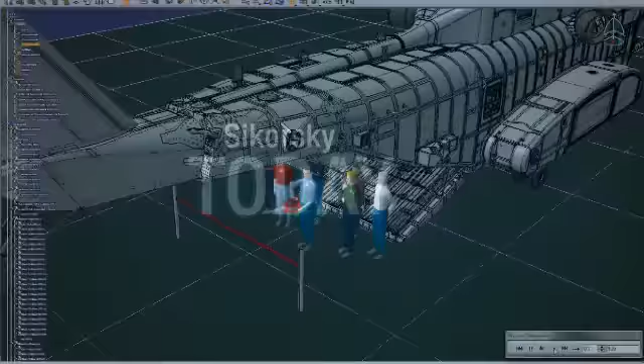Sikorsky Aircraft has officially launched a new virtual reality center for the CH-53K heavy lift helicopter program, taking the manufacturing of the next generation heavy lift helicopter for the United States Marine Corps into a whole new dimension.

Engineering is all about making things and making things better. And when you're engineering helicopters, you've got a lot of things to consider. Due to the size and complexity of the CH-53K helicopter, we had to be creative in adopting its design and development. The Virtual Reality Center is housed within the engineering laboratories at Sikorsky's main manufacturing facility.

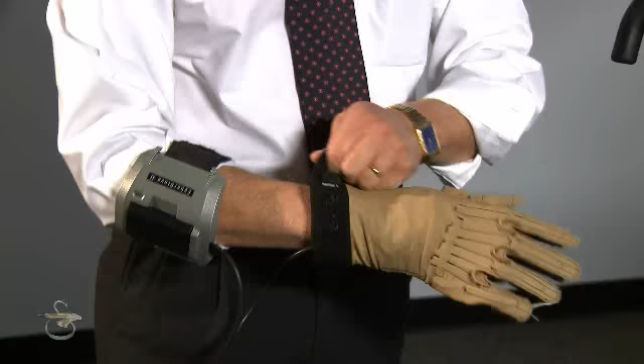12 cameras are strategically placed high along the walls, capturing movements of the operator, who is then immersed into the CH-53K digital environment. Head-mounted displays, sensored gloves, and a force feedback system allow virtual interaction with the aircraft. All data processing and recording takes place at the command center in the back of the room.

Until recently, the work of the engineer was complicated by the limits of the physical world, and the testing and retesting that accompanied that environment was inefficient and costly. Now we can perform installs in this virtual, computerized, three-dimensional environment that allows us to animate the parts to see how they'll fit. All of this innovative technology comes together in what Sikorsky deems to be perhaps the most complex aircraft development it has ever undertaken.

Sikorsky is building the CH-53K heavy lift helicopter under a $3 billion system development and demonstration contract with the United States Marine Corps. The heavy lift mission is critical. It calls for an aircraft that can stand up to the daily punishment of temperature extremes, high structural loads, and harsh conditions that are associated with shipboard and austere location operations.

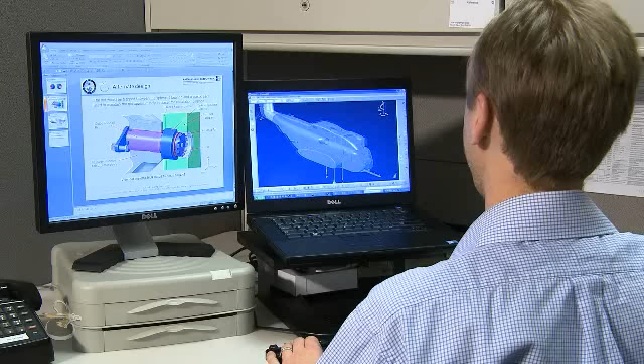Developing this large, complex aircraft is no small task. The use of a virtual reality center offers tremendous efficiencies, saving time and money in identifying design gaps long before the real components are ever assembled. We're building a helicopter that will have more than 20,000 individually designed parts, all of which have been modeled in a fully 3D digital environment.

Using the aircraft components the designers create with CATIA software, they can now determine whether the parts can be assembled within the required manufacturing clearances that are revealed by a color coding process. We have already yielded design benefits from the new software.

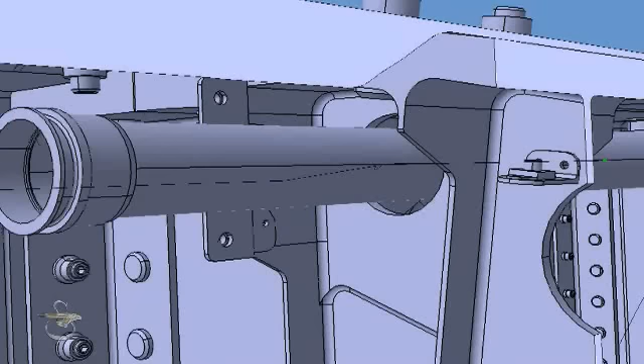We uncovered a handful of fuel lines that required modification because the parts would not fit into the aircraft as originally designed, or would have been damaged upon installation. We've estimated savings of about $18 million for this one event alone. The efficiency of the Virtual Reality Center will carry over to the maintainer's role, ultimately delivering to the customer a one-of-a-kind machine, the most capable helicopter ever built.